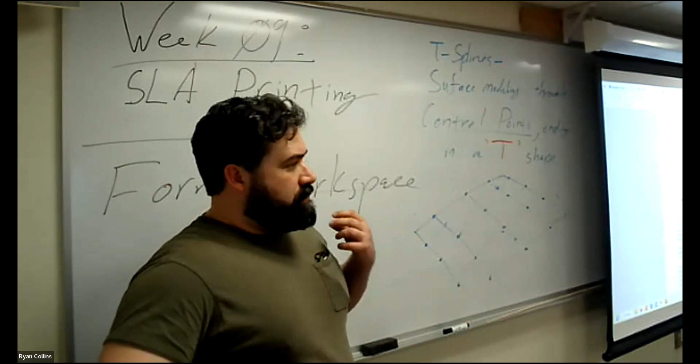There's a variety of different printers. SLA is really just another general term - stereolithography apparatus, extremely open-ended. But where our filament printers extrude a physical medium, extruding a heated piece of material, the resin printers have a resin bath, a liquid bath of photosensitive resin.

So let me switch over to here, and this is actually the unit we have. This is a Form2, just one of their models. There are many different types of resin printers, this is just one type. The main one being this, often called the DLP, digital light processing or digital light projection.

Essentially what it does is, yes, your slicer program still will slice your model into a multitude of layers, but where the filament printer has to physically move across the X and Y axis and deposit physical material, the resin printers, most types - this digital light processing type - actually have an ultraviolet laser inside, and it basically exposes the entire screen in milliseconds. So it can do an entire layer in a couple milliseconds, depending on the complexity of your form.

Now there are different types. Some have an actual exposure, like literally an LCD screen - think of any touchpad. It actually has one of those that's super high intensity output, underneath the tray of liquid resin. It flashes that exposure, it hardens that photosensitive resin in that layer. The platform moves upward away from the bath, exposes the next layer, and so on and so forth.

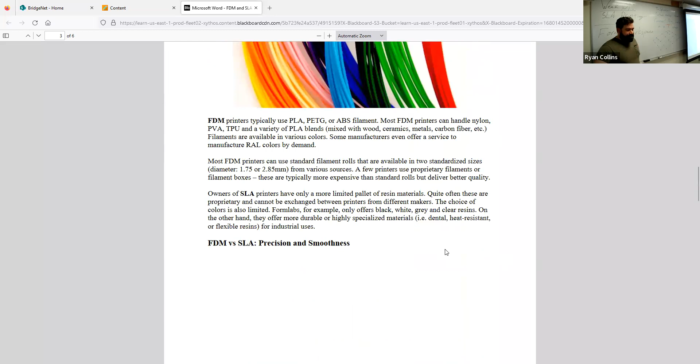So that's the basic rundown of the difference. Well, what does that really all mean? A lot of it's just price and detail. As this article discusses, I'll zip down through some of the different options - this is post-processing cleaning, like I was saying, SLA versus FDM, which is the one to use. Again, there's drawbacks, pros and cons. Materials and printing volume tend to be cheaper and larger with the filament printers. Resin printers, SLA printers, have much higher detail.

The materials are more expensive, and the print volume is smaller, but it can also tend to print much faster because it's not physically depositing material. So that's really the big difference. The major difference is cost, print volume, and speed. It's really what it comes down to.

And if you have access to both, it doesn't matter. All right, well, let's show you how to actually use these things. So let me switch over. Because Formlabs has its own proprietary use, it also has its own proprietary slicer program. Now, here in the room, we have them loaded onto these computers.

I actually just updated those so they're all set. But this is the build workspace, very similar to what we've been using. I knew that was going to happen. Pardon me a moment, let me pause here. Come on.

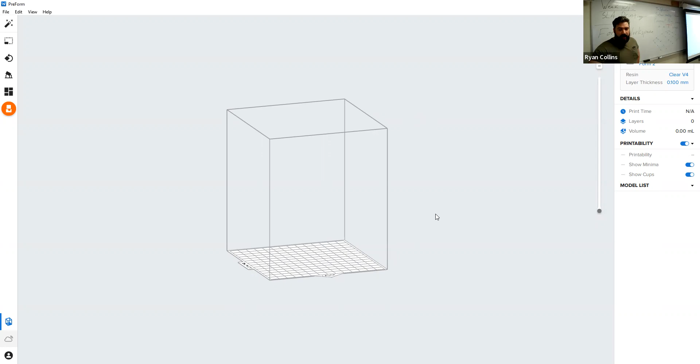Remember that. Okay, so this is the slicer build space, very similar to what we've been working with. The main details being that you have your virtual build space. Of course, it has different keystrokes to orbit, tumble, and such.

Orbit is right-click and hold, at least on Windows. Pan is hold the third wheel and pan, and then of course zoom in and out. You got it. And of course, you have the main controls, and home is a little eyeball button. Press F. So over here you have your job info and such.

Now, if you are not physically connected to a printer, and in this case, though we have a network here, these two are not networked. So you will have to physically be here to set them up. But they do have onboard storage, so there's no swapping of actual physical disks and such, like the SD cards or thumb drives. There's none of that. You actually physically hook in and take it right to the printer.

So that also means that if you want, you can load Preform onto your computer and just plug in with the USB cord there, or you can use the desktop we have connected. So with that, you will need to know which one you're selecting, but if you plug in, it'll automatically detect. So from the right here is this large build click area. Select here, and you have an overwhelming selection of things, but that's because I currently have nothing hooked in.

We are using a Form2, as it says written on those printers. We have a Form2, and we are using clear resin, number 4. Like I said, it will automatically detect, as well as actually the Formlabs current models actually have a sensor in the large reservoir in the back, so it automatically detects what kind of resin you have.

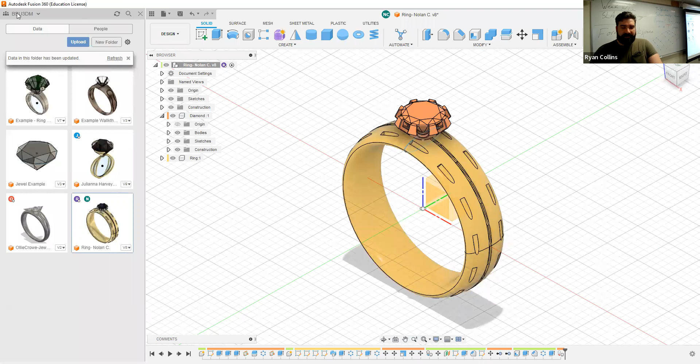So let's do that. Let me switch back over to Fusion, and let's get our model going. Let me close that out, get one of mine. I've stopped everything, and we'll do that one, just so it's a direct one-to-one.

One of the main things you need to know is your model needs to be joined. So unless you intend to actually print the jewels separate, you want to join these physically. Now, the issue with that is the previous assignment was that they needed to be separate. All that means is at this point, join them together.

So we'll go to a combine tool, select the target, select the ring. Now, if you want to keep these completely separate, select something like new component. It'll save what you've done and kick it out as a new component entirely. There we are. So my original one stayed exactly how it was.

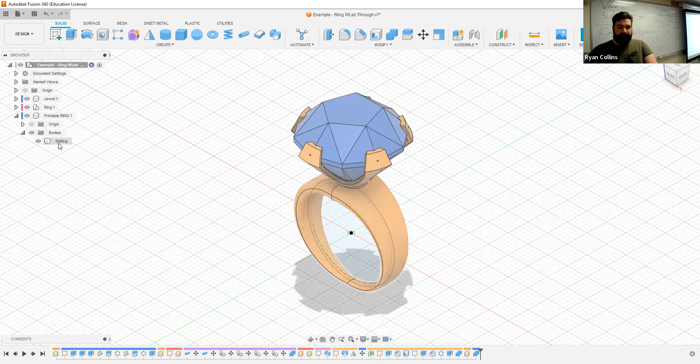I did not mean to make that uppercase, but there we are. So now I have a completely joined one. I don't know why it says settings, but let me hide the others. Now I have this one entirely, and we're all good. So rename that one.

Okay, so that is joined. And because we modeled this by actually using the ring or the jewel itself as a cutting tool for the model, then it's going to fit perfectly. So we're good.

All right, so select the object as we've been doing in the past. Take the model, go out to either export or 3D print. I'm going to stick with 3D print. Again, deselect the send to print utility. And this would be one of the times where you definitely want to make sure you have your refinement set to higher. Now, as we've talked about, you have your other options, 3MF, STL, and OBJ.

I have found occasional issues loading 3MFs into Preform. Now, there was a just now release, I just updated. It might be solved by now, but I'm just going to stick with an STL for now. You can do whatever you want, and if there's issues, go back and redo it.

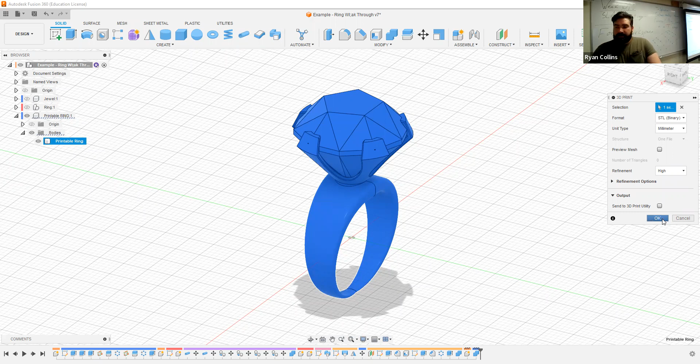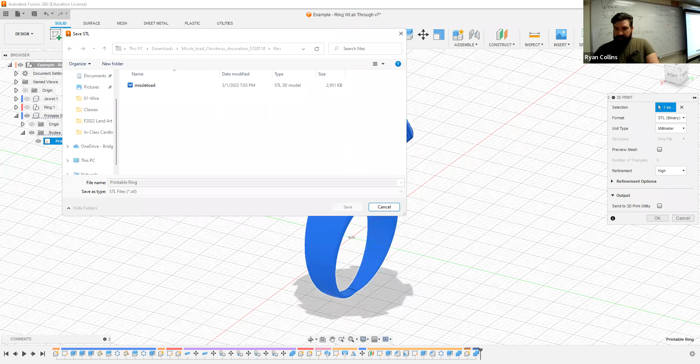Save that, printable ring. Nope, not in there. Let's just leave it in the... come on, everything is going painfully slow today. Let me pause the recording. That actually pause. No, it did not. Okay, so that solved it. I guess it just crashed.

I'm not sure why Fusion froze up there, but all I was doing was just exporting my model after I had joined the two into one solid object.

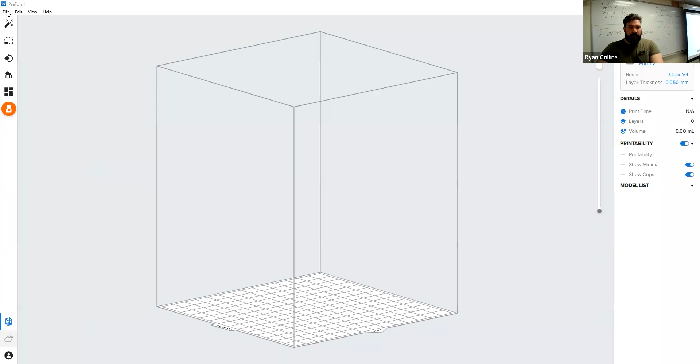So switch back over to PreForm now. You can also open up windows and drag and drop, or you can open models like so. I'm just going with the printable ring, and you can see a couple things immediately.

One of the most immediate things is you will get errors and such shown both in pop-ups as well as over on the right-hand side. But one of the most immediate things to be aware of is that, unlike the filament printers, the extruder types, you cannot print models flat on the build plate of a resin printer because it has to build some sort of a platform to print off of.

Now, even with this model, technically you'd think, oh, I could flip this upside down. The ring has a big flat spot on the top that should be a good spot. Unfortunately, the way these function, that doesn't work.

It builds a raft first of resin. So let me explain what that really means. You've got a few options here. Obviously, you can scale these as needed.

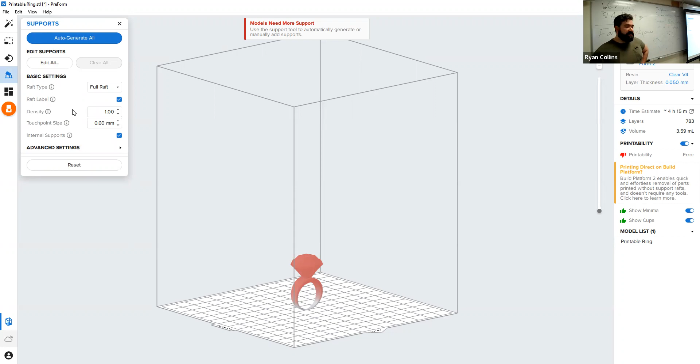I'm going to leave it as is. You have orientations you can do as needed, you have supports to be generated, and you can paint them in and set them yourself. I highly recommend using auto generate for all of these.

So first thing is auto orient. There are going to be times where you need to control the print, mainly if you have large flat surfaces that cannot be oriented flat. They need to be tilted, usually at least 15 degrees, if not 30 or more. That's because of the way the printing functions on these printers, it cannot be flat.

Remember, the build plate is inverted, so you are already working against gravity. If you print flat on that build plate, you will suddenly be creating an entire surface in one plane, and it's way too easy to trap air bubbles. But if you angle your print ever so slightly, it will still print and create scaffolding supports, but air bubbles and imperfections are far less likely to get trapped or created.

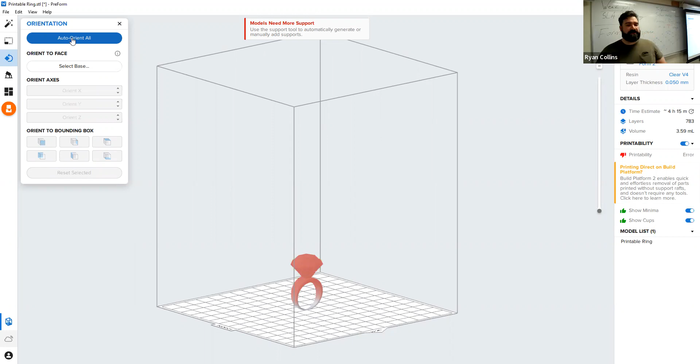So for orientation, I'm gonna hit auto orient. That doesn't seem right at all, that seems like the most inconvenient way of placing that. We'll find out, it might be a problem, but there we go.

And of course, I'm getting all kinds of errors here. Printing directly on build platform - yeah, I know. And unsupported minima, that means there are overhangs, that's really where that comes in, or there's like cups, things like that.

So let's move down to supports. Now you have two main ones here, the raft type, like I just said, you have a full raft and mini rafts. Of course, you also have none, but that's not really as functional for what we're doing.

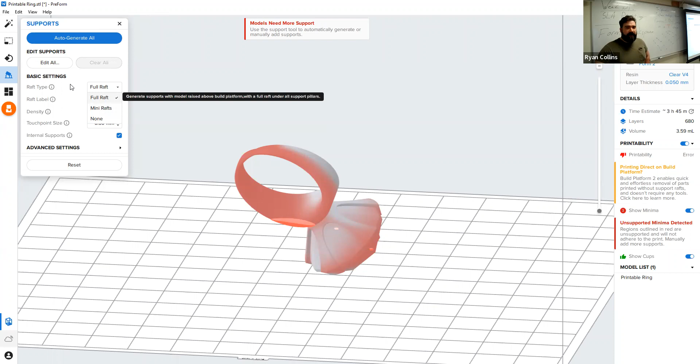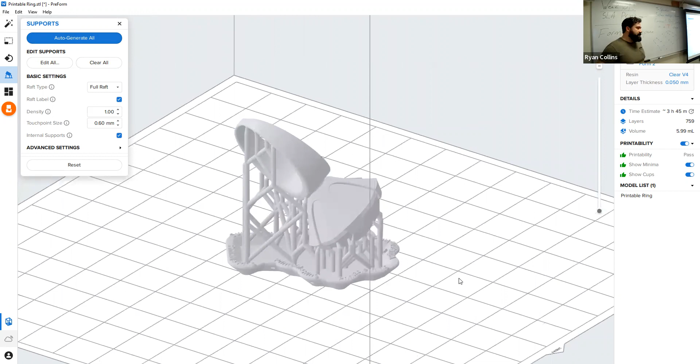Mini raft will... well, let me show you what a full raft does first, that makes more sense. Just go to auto generate, that's going to generate them. This is a raft, so it has created this entire platform to then build all of the supports from. Now you can see why it's oriented in such an odd way, with all of these strain supports going up. This is generated not randomly, but in a more idealized fashion, trying to minimize the amount of contact that supports have with your physical model.

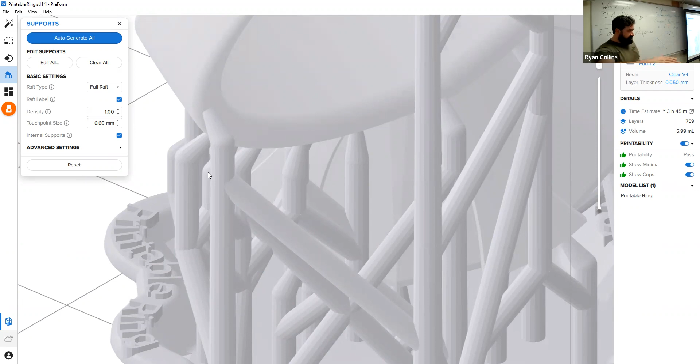This is actually a new feature that Prusa printers, or the Prusa slicer and others, have started, rather than just flat grid-like supports. Others have adopted this as well for filament printing, but this is where it really excels, on resin printing. So you see all these little scaffolds here, all these little pipes, they then come to a little pointed cone.

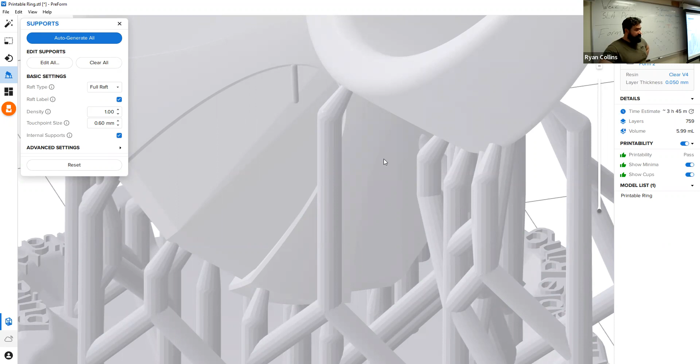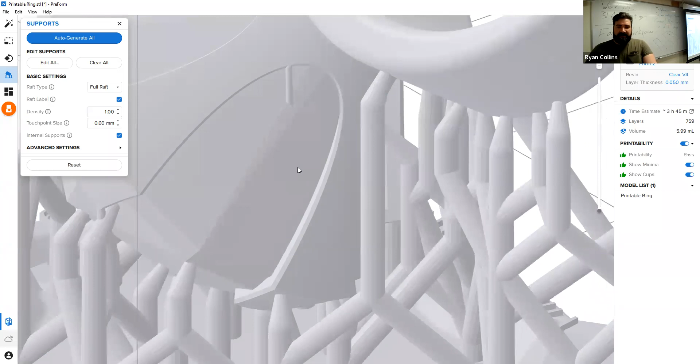Now, when this happens you will have to cut these away, unlike filament printing where they'll break away. You have to cut these away, and just so you know, you absolutely should be wearing glasses of some type. If you wear glasses, you're fine, but they are tiny, rigid, and brittle, so when you cut them away they're very likely to clip and go flying, and they hurt a lot hitting your face, especially eyeballs.

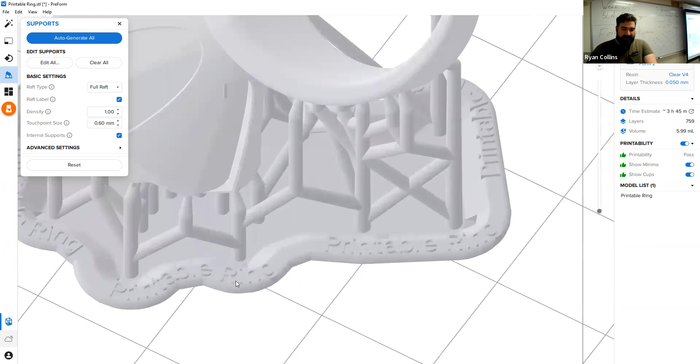But you can see where it'll generate odd ones here, like this odd underside - it has created a support actually from the model to the model, so that's not supported elsewhere, it's only inside. That's one of the things that will be created. Also, a neat thing is if you need to keep things separate, it'll actually put the model name on the rim of your little raft. I don't know, if that's neat to you, super.

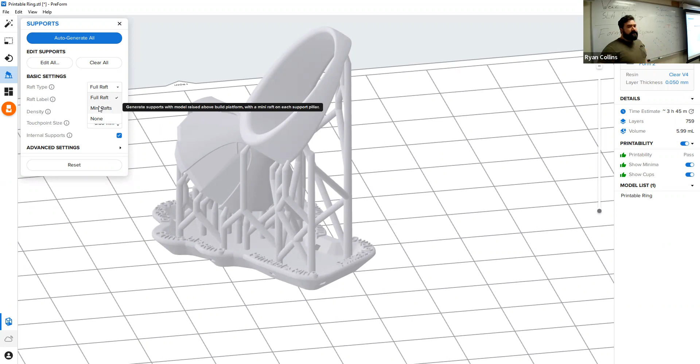The other option is if you have a model that maybe spans a wider amount - this obviously makes more sense to be in a single raft. However, if this were a larger object with maybe two main areas that would need to be connected, you can have mini rafts. I'll go ahead and switch over to mini raft and auto generate that, see if it actually changes for this one. There you go.

It just tries to minimize the amount of material used and wasted, but also just present. So even like this, as you can see, instead of printing one solid thing, it has a bunch of little footings and such, but it still has to have some sort of a larger footing.

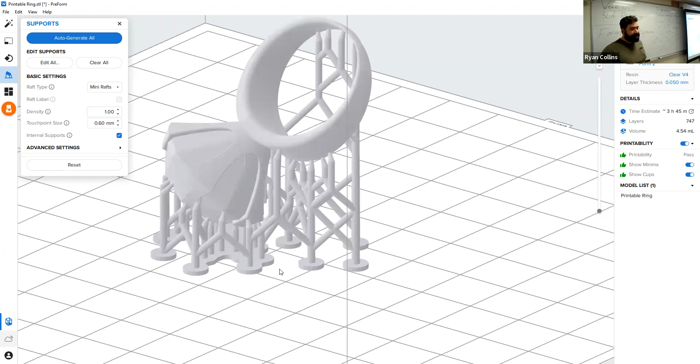It's irrelevant which one you want to choose, it's up to you. I just recommend using auto generate for now, and you can manipulate this stuff later. There's also more advanced settings, but honestly I've tweaked a lot of this for what we're going to be doing. I would use the auto settings.

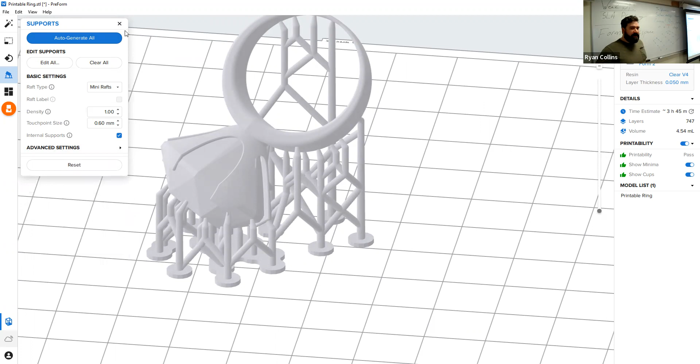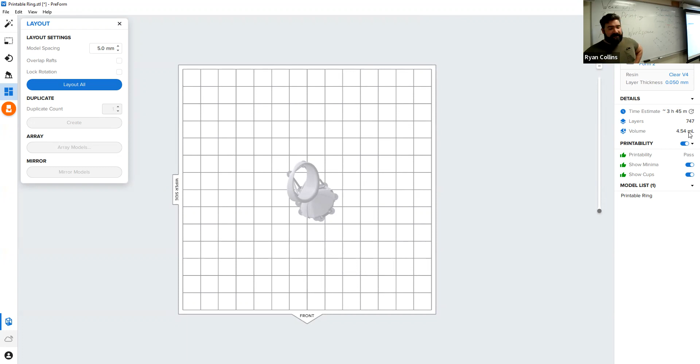Then you also have a layout, right in the middle, it doesn't really matter where. But one thing I want to point out is that right now you see estimated hours, 3 hours 45 minutes. Seems like it's going to take a lot. You have layers, 700-something, and liters, that seems like a lot, but it's milliliters, so it's actually a tiny amount.

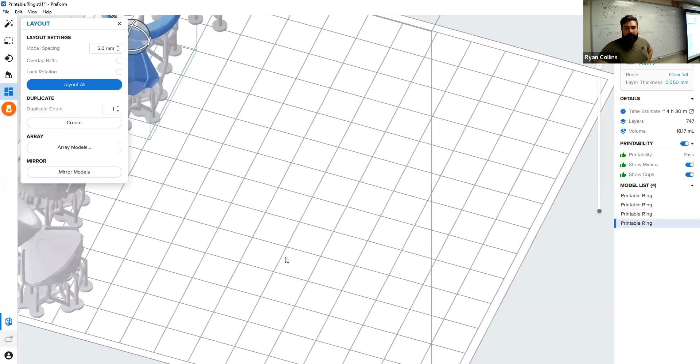Two things I was trying to think of: what happens if I decide I want to print a bunch more of these? Let's go to auto layout. Look how much the time changed—hardly at all. Not a big jump in time.

That's because the exposure all happens basically at the same rate. If you wanted to print a bunch of these, or if multiple people wanted to print all at the same time in a hurry, it actually takes not that much more time to print multiples, because unlike filament printers, you're not having a physical head moving around a platform and depositing material. This is simply a laser light show going on underneath, and it just has to hit a couple more points before it moves up. So you can actually knock out quite a few at the same time.

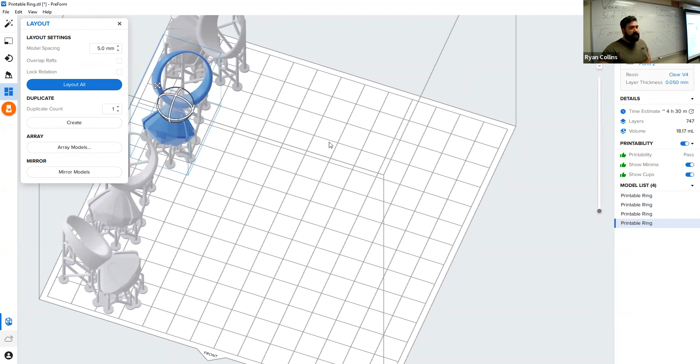The other thing is you can minimize all of this. Let me just delete these—doesn't matter. You can minimize all of these, and you see it didn't really change much. 345, 430, it's fine. Wherever you want to plop this is fine, it doesn't really have any issue.

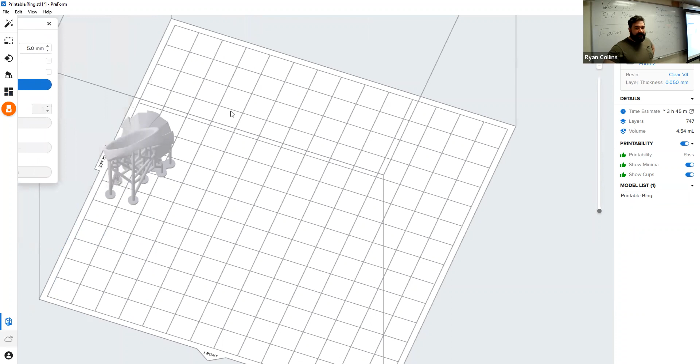The only time this becomes a problem as far as orientation is if there are variables in the print build or print area. What I mean is that sometimes there are occlusions, like actual bubbles or something forming underneath the print tray, and technically that means you need to stop and clean everything. You can get away with it a little bit, but you really should not do that.

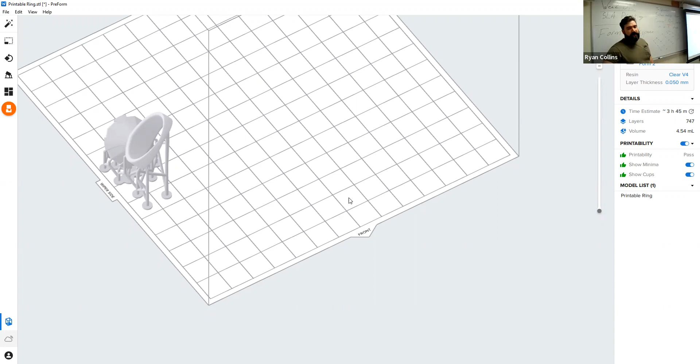But there we go, that's really all you need to do. If you want to leave it wherever, that's fine. If you want to auto orient, the next step is you would have this already connected to your printer. Hit the big orange button—you would already have a print going, or have your printer physically connected—hit upload, and it will put it onto the physical printer.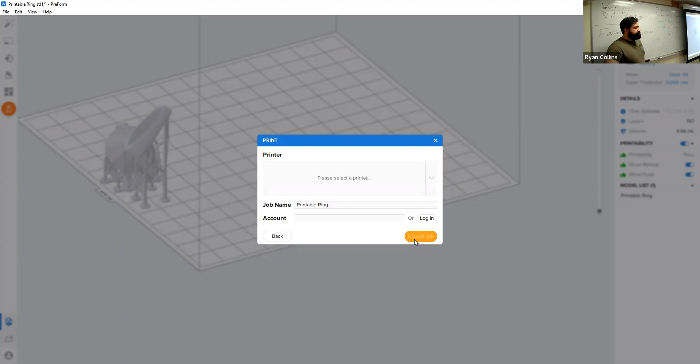Main thing is clean up after you're done. When you go to print these, you do need to make sure to wipe everything down afterwards, and I'm going to show everybody individually how to do that. But the main thing is you physically remove the entire print bed—it's not the tray, it's a print bed. You physically scrape the model off into one of our sealed vats of isopropyl alcohol, then wipe down the build platform, and rinse off your model with the same isopropyl, just to clean off any extra muck, which is more resin. That's all, so it's pretty straightforward.

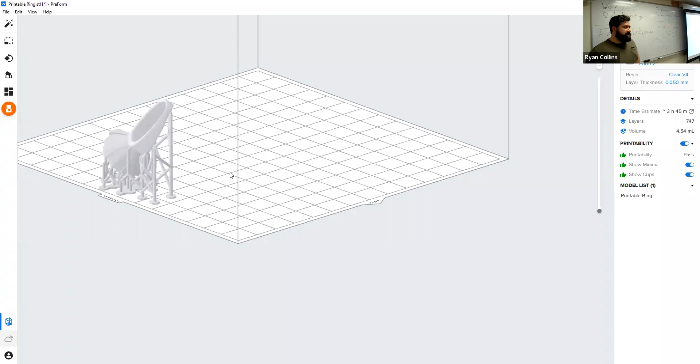The main thing is just knowing where and what support or what buttons to push. But in all reality, I've had very good luck with just auto generate. So hope that helps, and good luck.